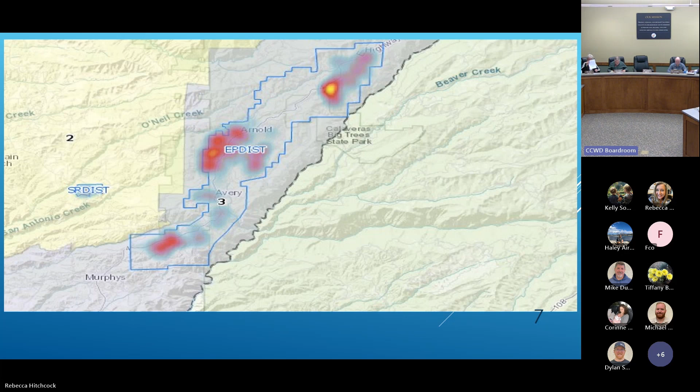All right, diving into the heat maps for leak repair. It's always somewhat difficult to illustrate this because some of the service areas are quite large, so I try to take a very distanced photograph, if you will, of the heat map. So this is the pass. You can see the Arnold area is really the focal point for repair.

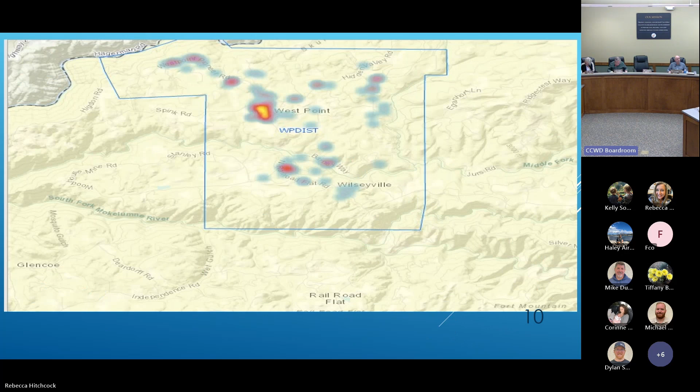Diving into service line repairs. We always have to begin with Rancho Calaveras. This is one in Vista del Lago. The pictures are a little distorted, I just wanted to try to convey the difficult access this one had. You've got two services, you've got a leak, and then you've got a storm drain pipe in the middle.

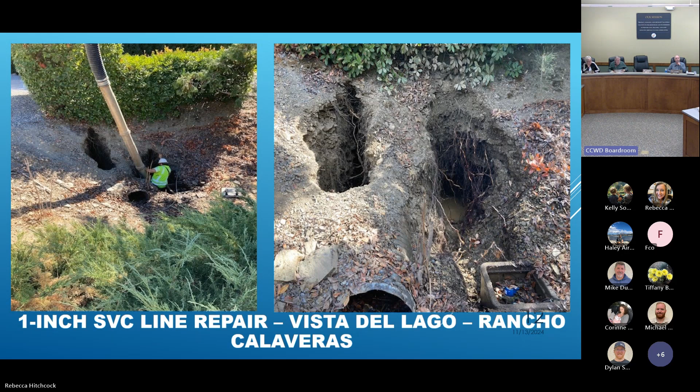You have no access, so you've got the vac with the boom out. Incidentally, somebody was talking about Kanaflex earlier - that's the flexible hose that lives on top of a vac. When it's sucking up debris and rocks, it often will tear over time, it has a lifespan and needs to be replaced. So this was a 5-hour service line repair simply because we couldn't get a dump truck there or get close, and our guys had to really work from a distance.

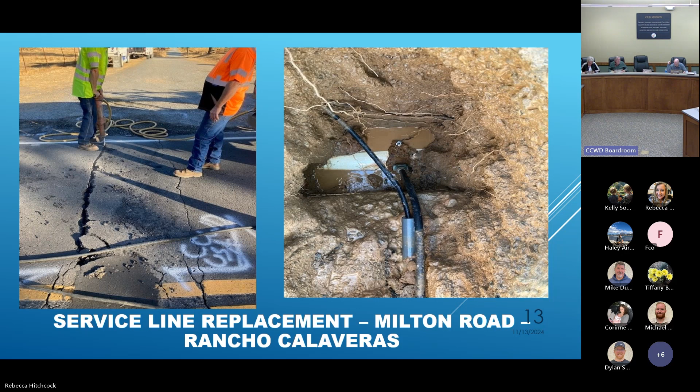Milton Road, here's an example of what a service line repair failure can do to the asphalt. You guys can see what's going on there. And interestingly enough, you've got these sleeved services with this aged tap saddle in the image on the right - kind of hard to see, but those sleeves are somewhat interesting. We found a pocked tough tube service line that lived in sleeves on Baldwin, which is quite interesting.

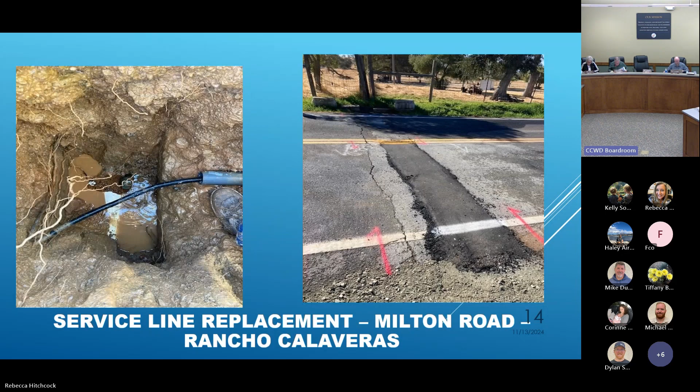So here's how well our folks clean up the road when all's said and done. Hats off to the guys down in Rancho for that work. And that's with our machine - yes, that asphalt machine that we got.

And here's one - it's kind of a theme that goes through this month of October, boulders, big old giant rocks. You can see that spray coming out of the tough tube in the image on the left, and it is below a boulder. That rock is just simply too big for our guys to get out of there, so then they have to come in and put a full circle clamp on that, and it's just got to live to fight another day.

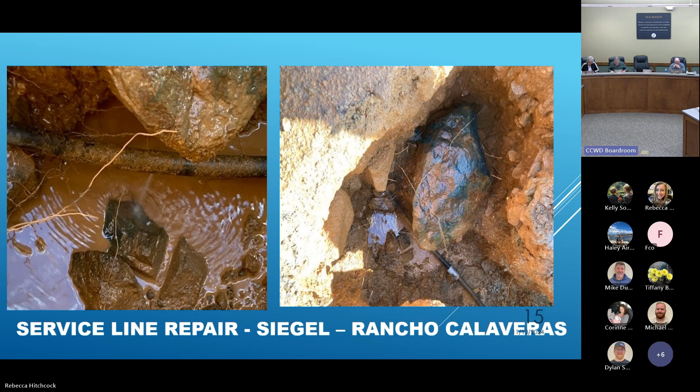Maybe we can put a bottle jack under the boulders and pour some concrete, I don't know. You definitely got to be careful when it comes to working next to something like that. Here's a representation of the kind of pressure we can see down at Rancho Calaveras on a service line failure - that boulder is not an example of your bona fide fill. No, when I would see that one on a map, I would say that's not a good one. Yeah, oh man, yeah for sure.

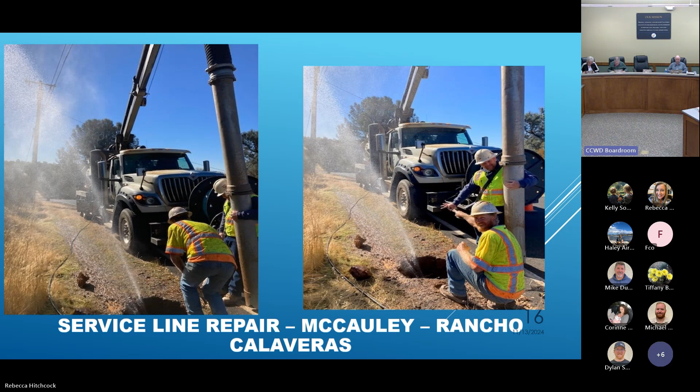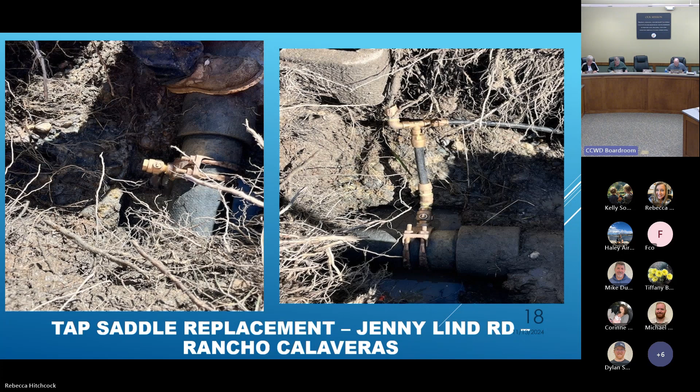Hey Damon, on the previous page I'm seeing how dirty the guys' pants get. Are those uniforms? Does a uniform company clean them or do the guys have to do it? We have a uniform company, yep, and the pants are the uniform too. What a mess. Right, but some guys like to clean them themselves though.

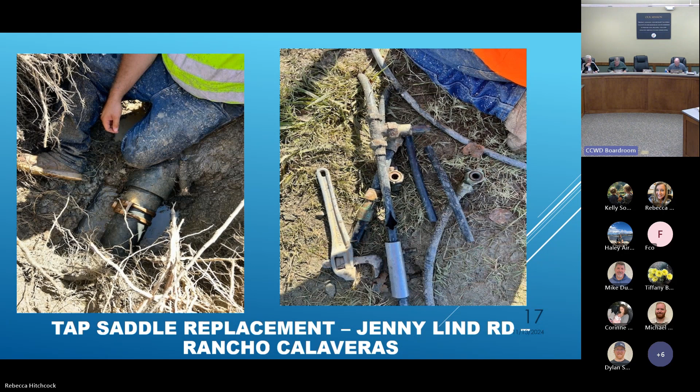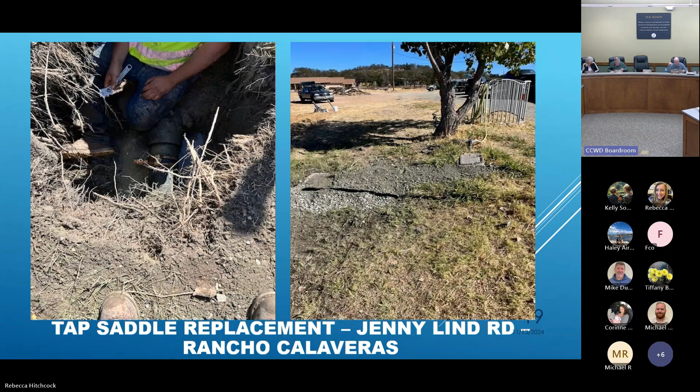So tap saddle replacement, Jenny Lind Road, the image on the right is kind of all this work down in this hole next to the main, next to this meter set, and then backfilled and cleaned up. You really don't know, it's kind of hard to tell that there was even something going on there. So hats off to the guys.

This is a really interesting one. The guys were going to go repair a service line, and they end up finding a buried valve about 3 feet deep. This thing's been living there for quite some time, not on any map. So this is kind of an acknowledgement that every single day somebody's gonna have to redirect and do something a little different. You thought you were gonna go fix a service line, but you're also gonna open up and expose a valve and put a G5 lid on top so we can find it in the future. And that's what the guys did. Hats off to them.

So there you go, the valve's all said and done. Everything's back to normal. That was a wild one.

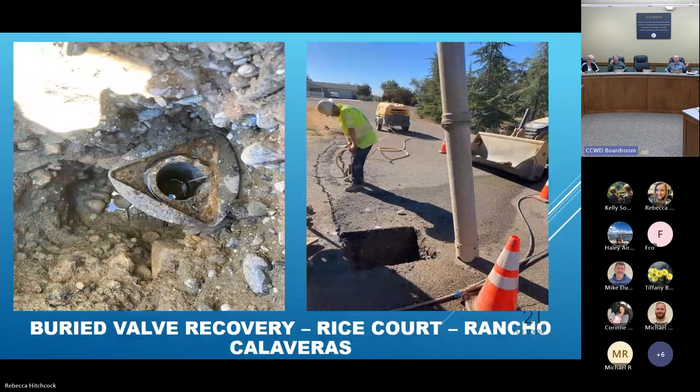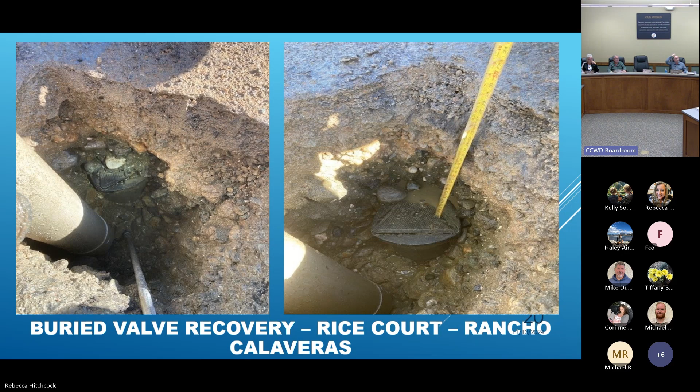And then they backfilled over the top of this valve, which perhaps was shutting off or isolating a small section of that court. In the future, you're gonna go do some more work, put some chip seal on this thing, more asphalt on top, and over the years, because that looks like a quite old G5 too. How deep is that? It's almost 3 feet deep when you look at that tape, I think it's 34 inches right there. So yeah, it's been there a while, that was really interesting.

So this one, main break repair on Hartvickson, the image on the left, you can see two crews working. The crew in the foreground is our crew working on this 8-inch main break, and the crew behind them is the DA Wood crew working on the A to B transmission pipeline project. This is about 6 or 7 o'clock at night. As DA Wood is starting to wrap up, our guys are starting to open the ground to fix this main, and it was quite a work effort.

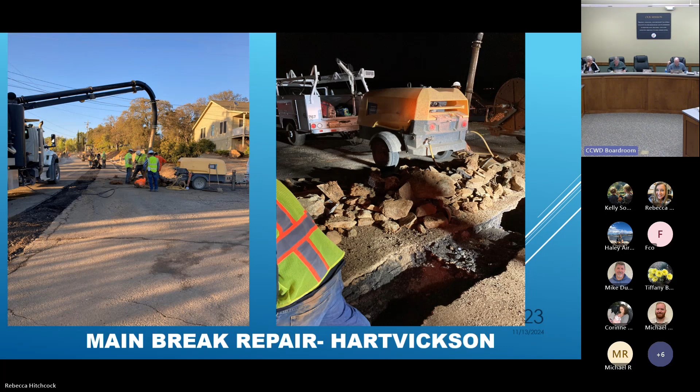The image on the right shows you the backfill that Russ was just acknowledging, the stuff that would not allow us to sleep well at night, living on top of this water main. You can see the image on the left here is the main in situ. We've pulled all those boulders out, cut the asphalt, exposed it, and sucked out all the material with that vac and the Kanaflex. That was the broken main.

And then when you pull it out, the image on the right, because it was at a bell, you can see that bottom connection to the bell. You can see that break, which is kind of an unusual break on a piece of AC like that.

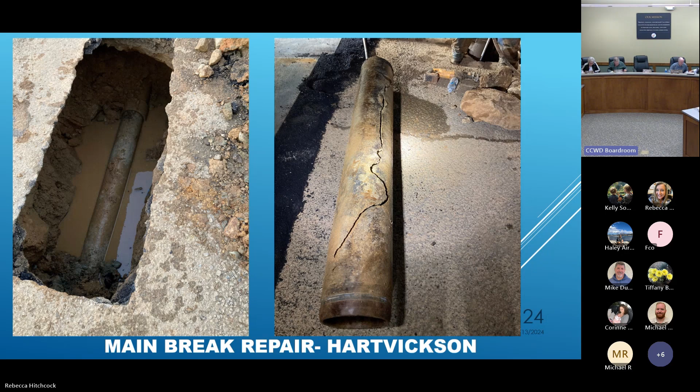Great tune, you know, when you consider the amount of debris and rock that was living on top of that thing and the amount of pressure it was under with heavy equipment driving on top of it, moving those rocks around, jackhammers, you can see it was almost like a pressure break. And that was shooting out close to 1 million gallons of water going down Hartvickson for about 40 minutes.

Because the challenge with Hartvickson is there's 3 different water mains in the road. One of them is a pump line, one is a line of water being conveyed from the treatment plant to our main storage tank. So you can't just go hit a couple valves and shut it off. You need to taste test what's going to shut it off effectively. And so it took a while.

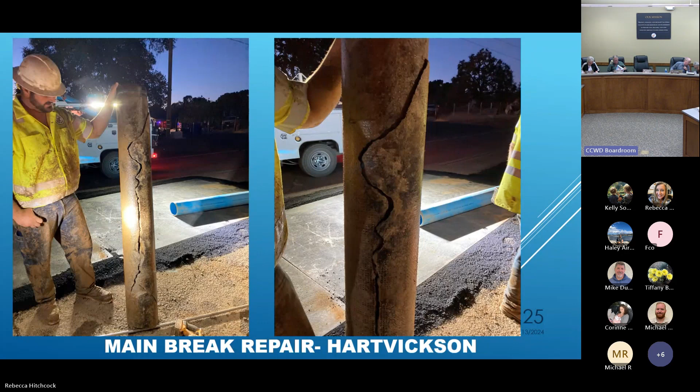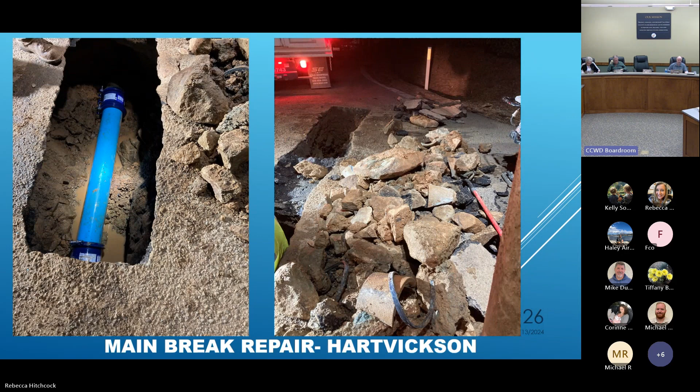And so there's the main install, the new install, and there's the material on the right. Incidentally, the crews threw all that in the back of a pickup truck by hand, because this site was too constrained to get folks over there. And then this is the compacting of the material. Good stuff.

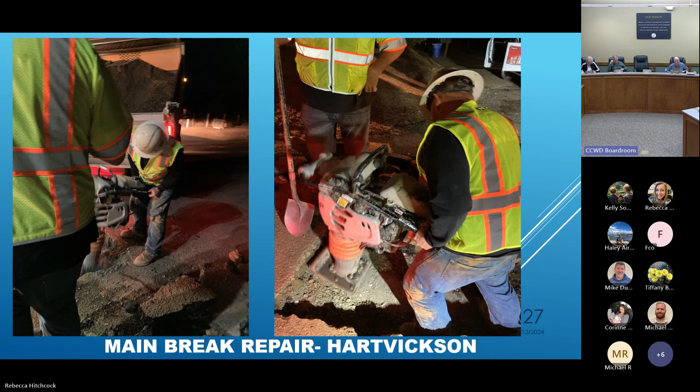Post repair, so moving up to Ebbetts Pass, you can see that the Ebbetts Pass guys are really effective at being exacting. You can see the tip on that VACON pickup tube on the left is to keep these guys safe from electrical.

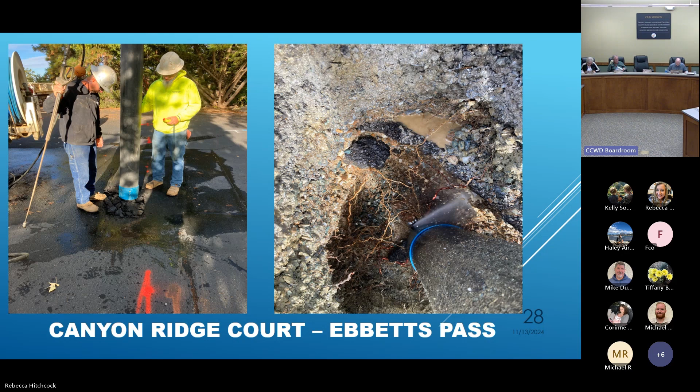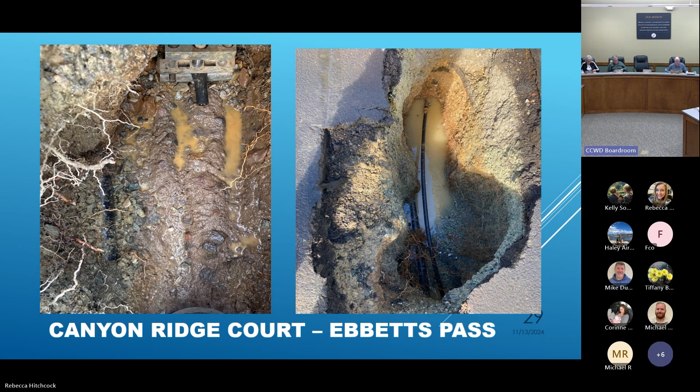This image on the right, you can see that spray coming out of the water service. But there's also, kind of hard to see here, an electrical line in the ground too. In the image on the left, you can see there's this apparatus that will actually shut the water off on our service line. It's that square box at the top of your image, and they've actually cut the service. And then the image down on the left, you can see that electrical line still in the ground. So our guys have to be super cautious in Copper and in Ebbetts Pass when they're fixing service lines to be safe around this electrical. It's just all over the place.

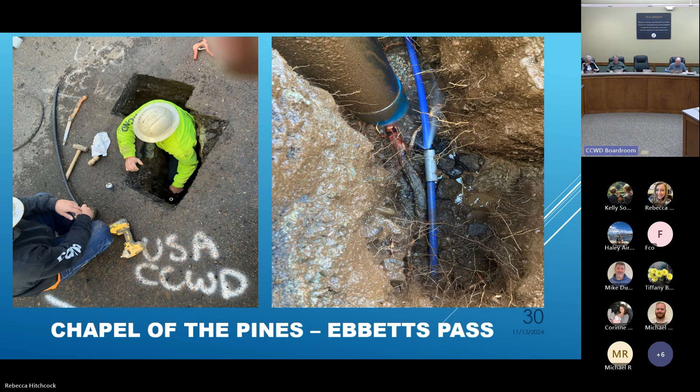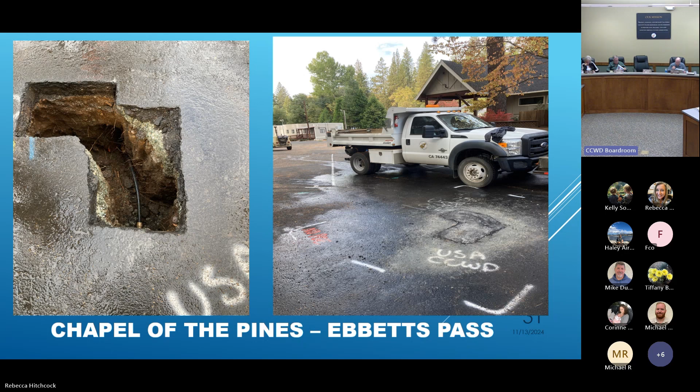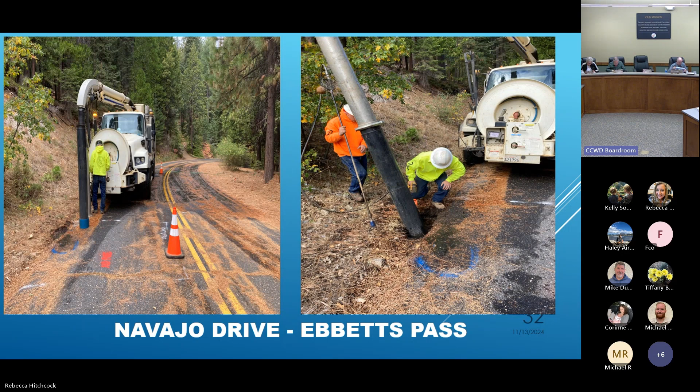This is Navajo Drive, another example of really exacting excavation for repair. Gives you an idea of some of the conditions the guys work in.

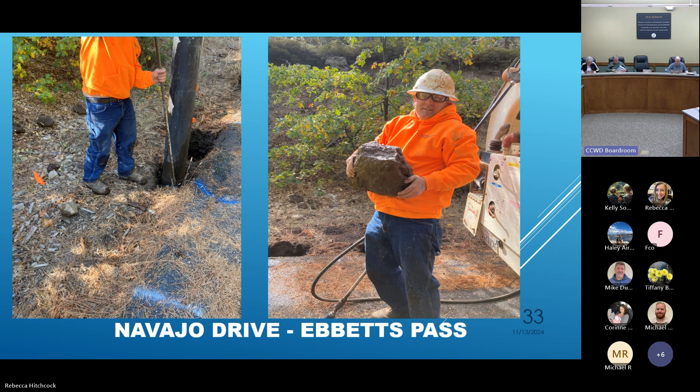Look at this, this is another rock. So this isn't even in Rancho, this is up on Ebbetts Pass. You've got boulders living on top of the service line. Guys just do a fabulous job. You can see the image on the left, pre-boulder, and the image on the right, post-boulder. And those aren't just water lines, you got some more, looks like telecom in there and electrical. So there's a lot going on in that hole right there. Hats off to the guys for doing great work.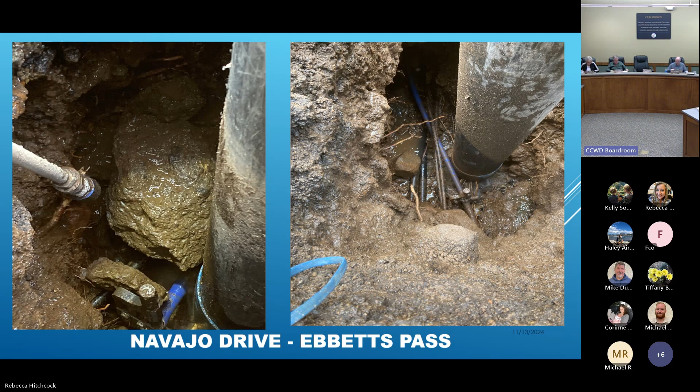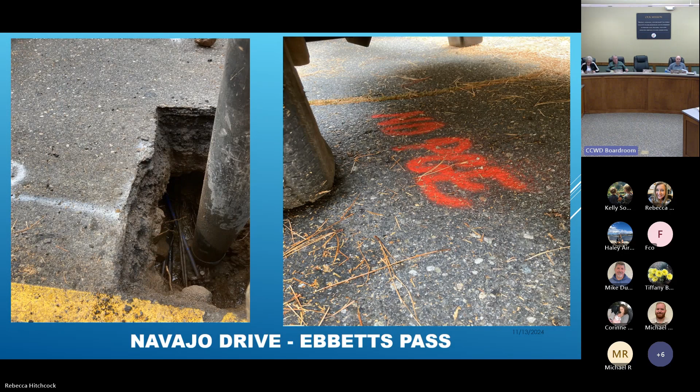Absolutely, here you go, this is a great one. No PG&E, yet looks like there's PG&E down in there. So that's kind of an example of some of the things our guys have to contend with. Wow, really interesting, testament to them. They're able to backfill that. It's just, what is it, a 2.5 by 2.5 square in the ground, and they're in and out of there.

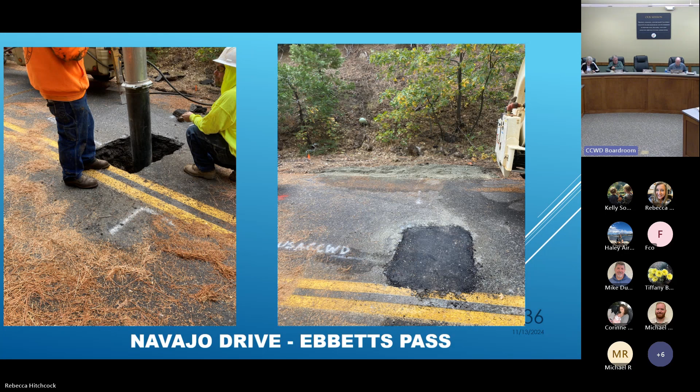Here's a corp stop replacement on Crystal Way. Another example of the great work the guys do, really clean, in and out of there.

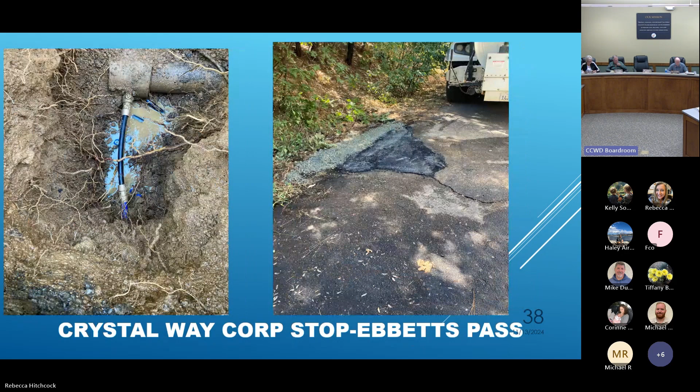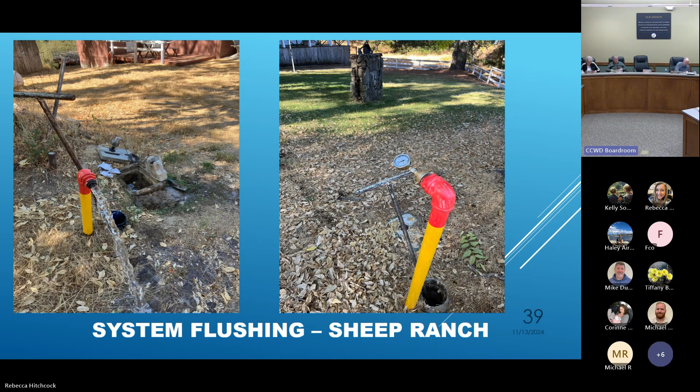And then system flushing at Sheep Ranch. So the fire system at Sheep Ranch, there's 2 actual conventional fire hydrants. The rest are these, what we call standpipes, and they don't have a lot of pressure behind them. So this is one of those challenges that Michael is always discussing with folks in Sacramento about how do we acknowledge fire protection, water quality, and the challenges around both for rural communities.

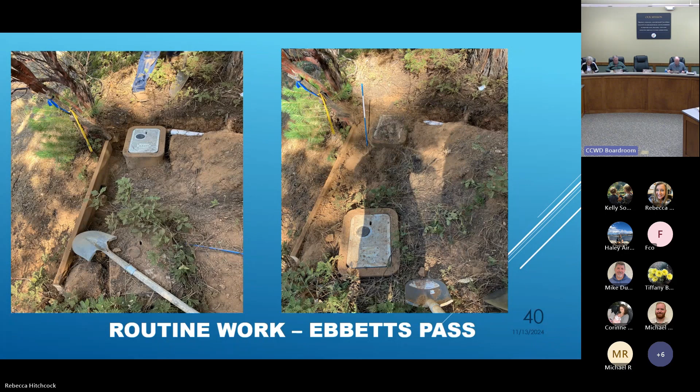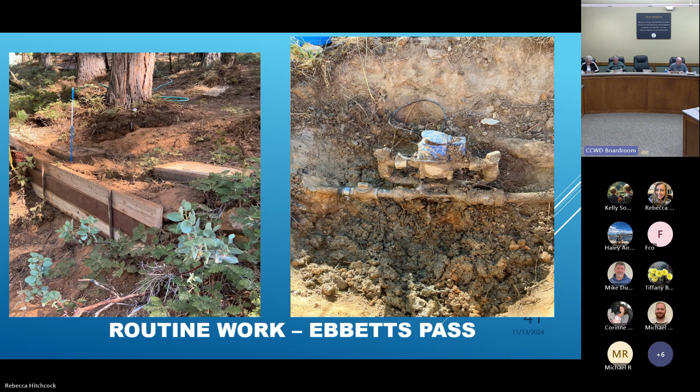Routine work up on the pass. This is work to inhibit erosion around our meter box sets. So we're going to put some 2x6s to keep the bank from falling off, so we can put meter boxes in and customers are happy and we don't have material falling off the embankment. Some more routine work on the pass: meter sets, PRV pressure inspections, and adjustments of CRDs and CRLs.

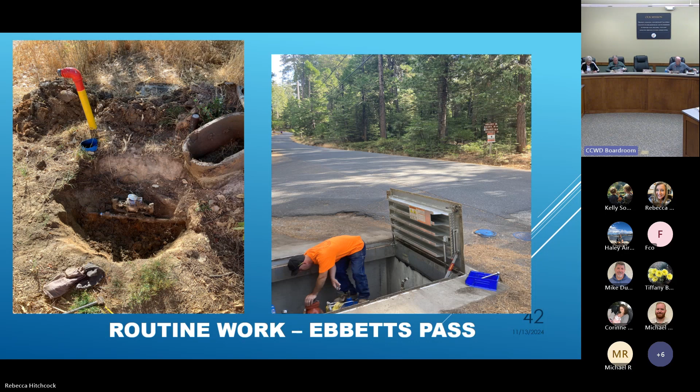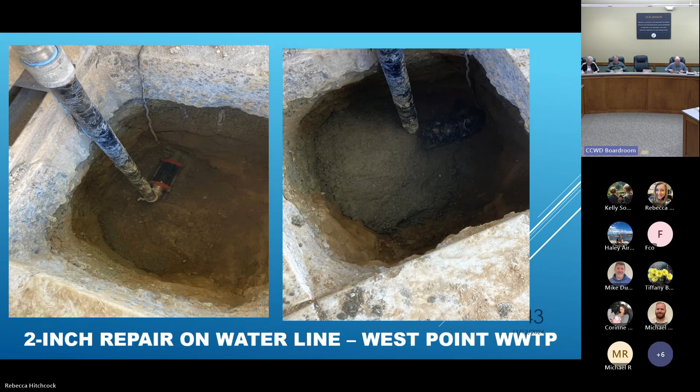So this is a great one - sometimes we just get interesting phone calls. This one was, hey guys, hey Damon, you guys own Wilson Lake? Yes, we do. Well, there's a truck in Wilson Lake and it's not stolen, and the owner has actually passed away.

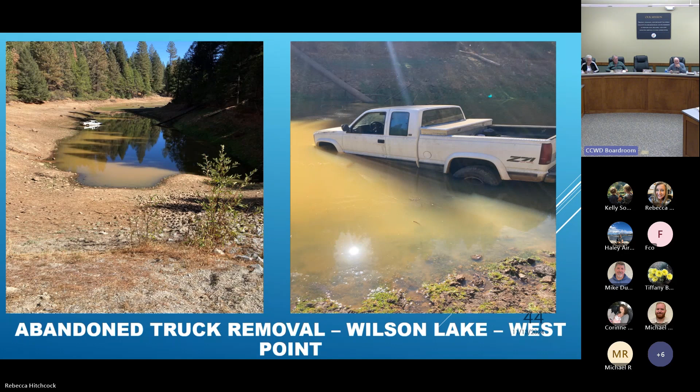So we called environmental health. They said, as long as you can get that out safely and there's no leakage, you're good to go. And that's what we did. Hats off to the guys over in West Point for getting this done quickly - we found out about it in the morning and two hours later it was out of Wilson Lake.

How long did it take to get stickers on the door? Not very long at all, actually. It's in the fleet now. It's a nice pickup.

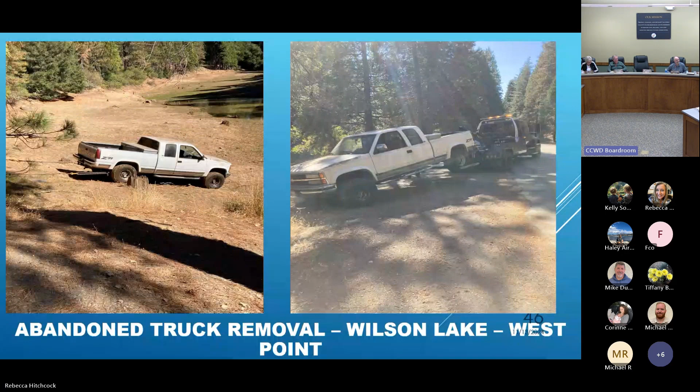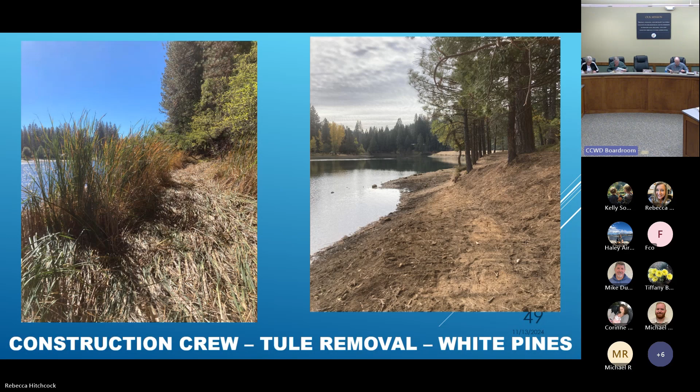Here's the finish of the Tule removal project with our construction crews, some before and after shots. The image on the right is what White Pines looks like now - it's starting to fill back up. Gabriel was talking about that earlier - we've gained about a foot since we completed the cleaning effort, so we can anticipate White Pines filling up rather quickly now.

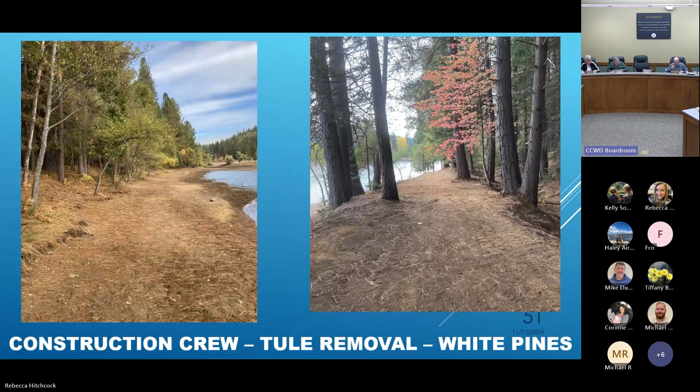Hats off to the construction crew, they always do fabulous work. It looks like even more of a park than it is nowadays - look how beautiful and clean.

I don't know if you guys noticed, but our electrical crew just plows through repairs. There's like 60, 70 of them.

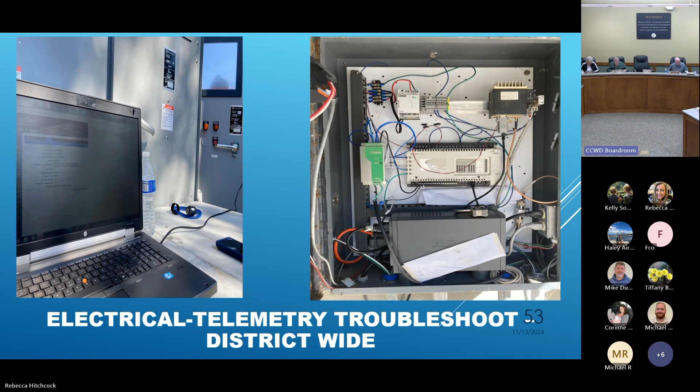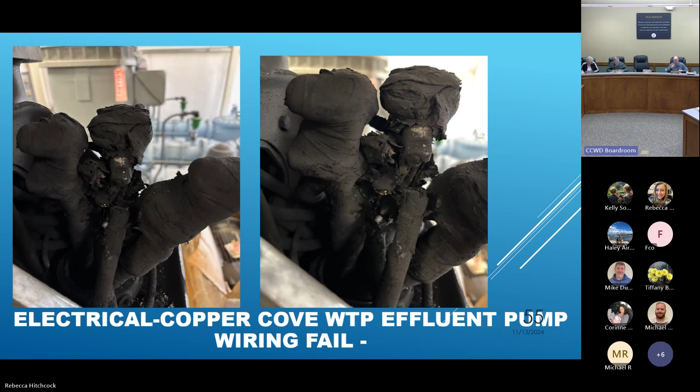Wiring has a lifespan as well. This is one of our effluent pumps at Copper - the wiring just basically failed. Our guys cut all these melted terminals up and then installed new ones and wired it back up. We were back in action.

And then hats off to the chili cook-off champion. He's won, I think, twice. He makes a mean pot of chili. Nice, hey Damon, thank you Damon.

What you're showing us, Damon, is when they go out on a trouble call and open up that box, they have no idea what they're going to be confronting. So they have to be super cautious for their safety, but then the analysis comes in. There's some psychology in that too - troubleshooting, especially if you get a call at 2 in the morning for an emergency, or there's an alarm going off at a facility, and you're opening that box not knowing what you're going to find. My hat's off - I don't have a hat, but thank you.